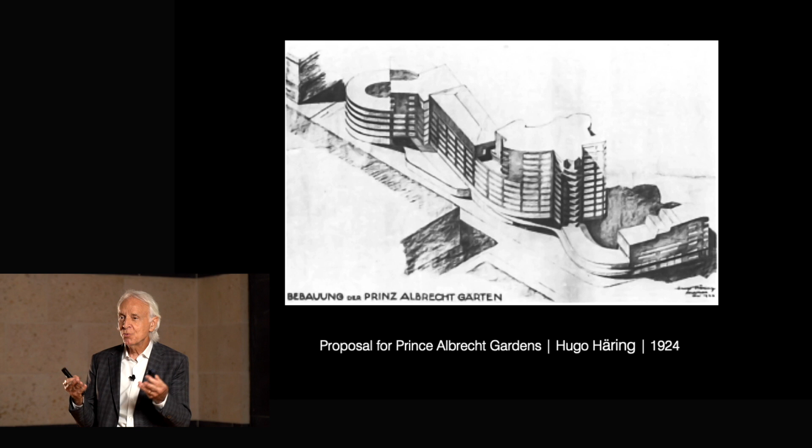So in his very early career, he's doing buildings like this. This is a residential complex in Berlin, actually never got built, but it was a project for it. In it, he was talking about movement. He said architecture petrifies and lays down once and for all the movement of life. He was not happy with architecture that was so static and so rigid, and much more interested in architecture that was fluid. Why is it that architecture can't take that same kind of form?

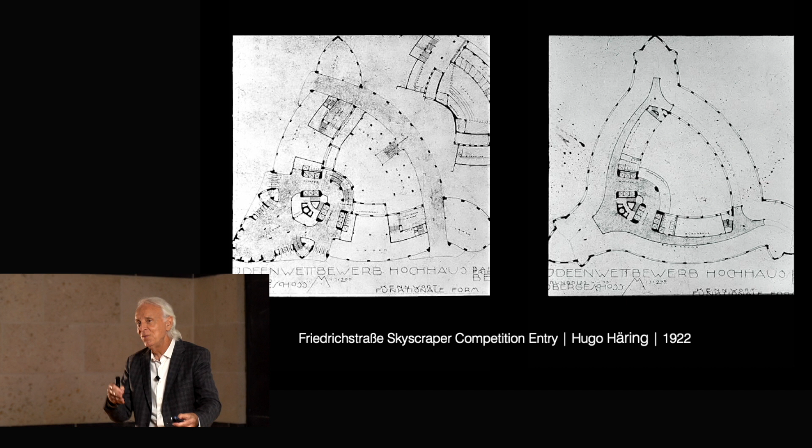This was another competition entry he did near the railway station, one of the main railway stations in Berlin. There are people who are surging and moving and coming and going, and so the architectural form takes those surging, moving, dynamic kinds of shapes in it.

This is a wonderful little building, again didn't get built, a lot of his buildings didn't get built. But in this particular one, he's designing a competition entry for a building for the Berlin Secession. I talked about in the last talk these organizations in Berlin, kind of artists and architects and people who came together and had exhibitions, dialogue, and conferences, really talking about issues of art and architecture and society. He was very involved, Hugo Häring, in Der Ring. This one was for one of those other organizations called the Berlin Secession. In it, we can see very clearly this emphasis on function and how form came out of function.

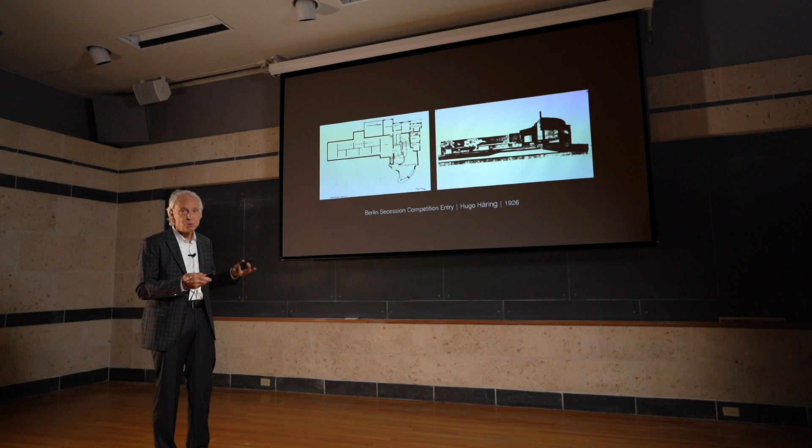So the program for this involved some offices for the people running the organization. It involved some conference spaces for members coming and meeting. These are static functions - I'm sitting in an office, I'm still. A rectilinear form is appropriate for that. In a conference room, I'm around a table. The room basically takes the proportion of that gathering-around-a-table function.

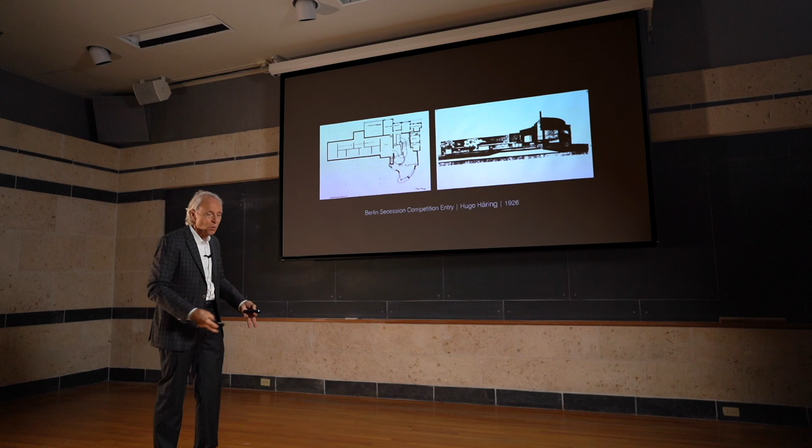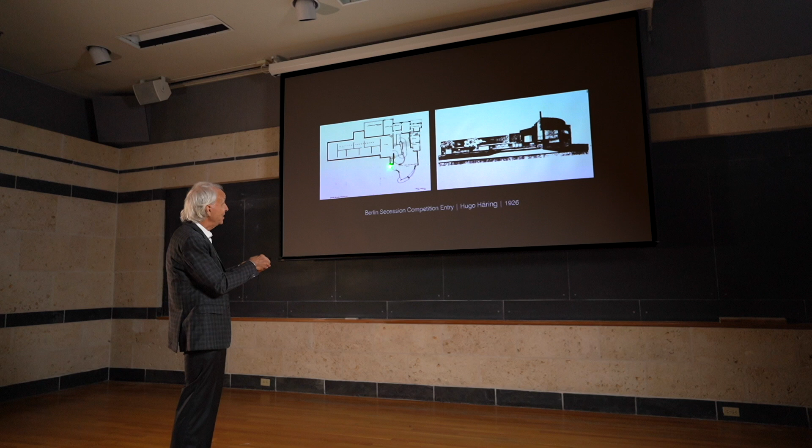But another very important function in the building is this exhibition space. You would have come in on the lower floor and swept up this stair like that. And what is an exhibit like? Well, when we're in an exhibit we're wandering around, moving over here, looking at this, moving over there, looking at that. It's a fluid, much more dynamic kind of activity. So he's making architectural forms that have that kind of fluidity to them.

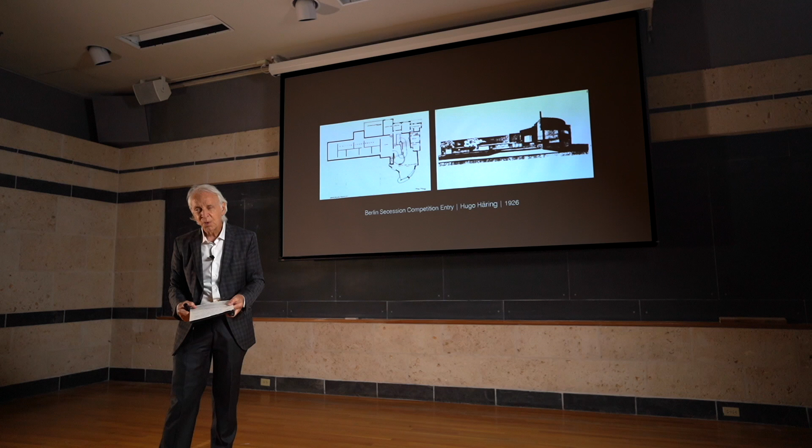I want to read a quotation from him in this regard. He says, the architectural image can only be discovered through a study of the function. I want to examine things to allow them to discover their own images. So he's really thinking through, what is this function? How can I allow it to discover its own image? How can I find within it the shape and form that's just right for that function? And in three dimensions, we see this building, part of it being very static and very rectilinear.

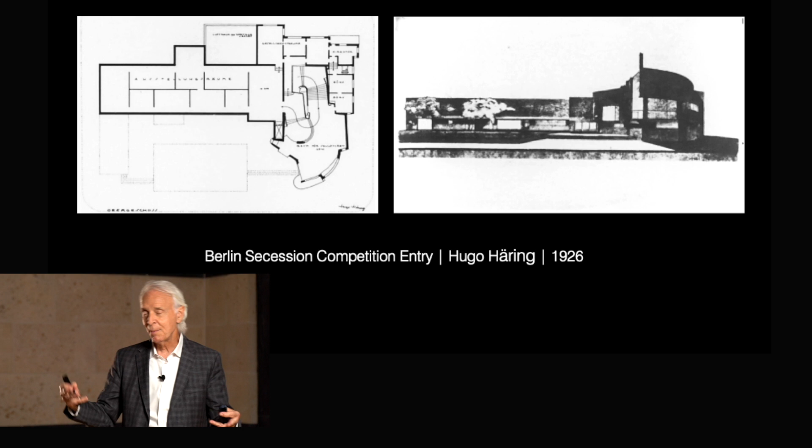And then at the moment when it comes alive and there's an activity and there's a reception or an exhibition opening, we see that dynamism expressed in the building itself.

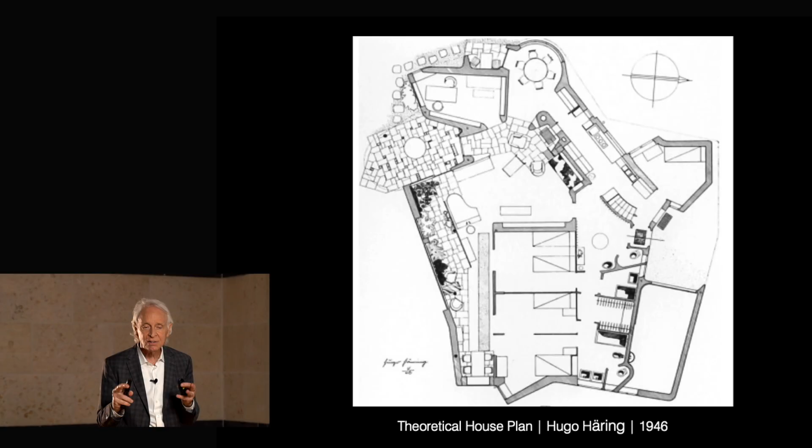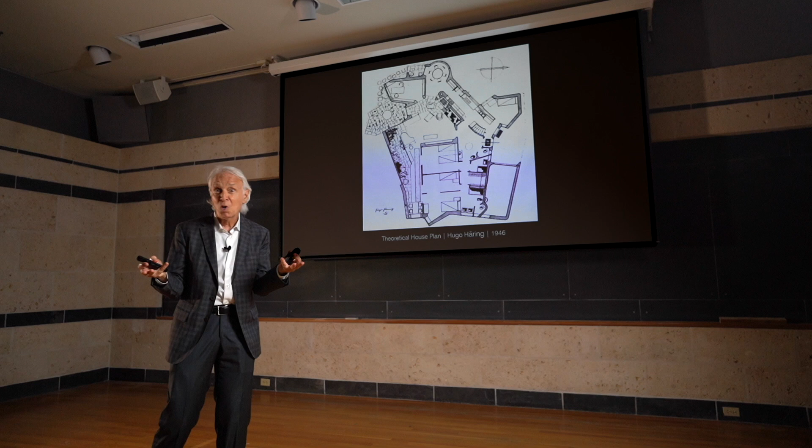You go into the living room here, and the living room is a whole series of little vignettes, little functions, like it's wonderful to gather around the fireplace and have chairs in the hearth and keep yourself warm. It's a cold climate in Germany. What a wonderful little ensemble around that activity of sitting by the fire and enjoying that.

And then right next to it is a kind of built-in sofa. Those chairs can move around and you can have a conversation area apart from the fireplace. But in that sofa area, you're also close enough to be warmed by the fireplace.

Over here, there's a little place for music where you can sit and play the piano and see out to the garden out here. Just the perfect spot for the piano, the music, and the view, all perfectly orchestrated. So when you might have a party, there's this fluid movement between all of these spaces, indoors and outdoors. And he's thinking of all sorts of scenarios for how that living room might work.

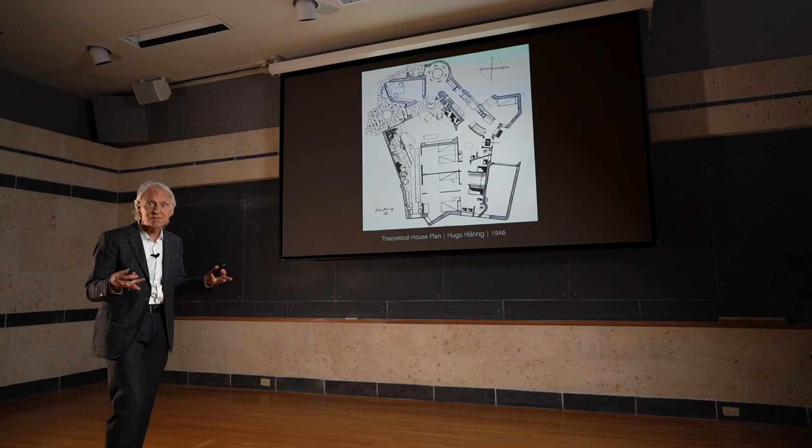The kitchen is incredibly innovative. At this point, a German kitchen would have been just a rectilinear room. You'd have a big old stove over here, a big old refrigerator over there, a big old freestanding double sink over here.

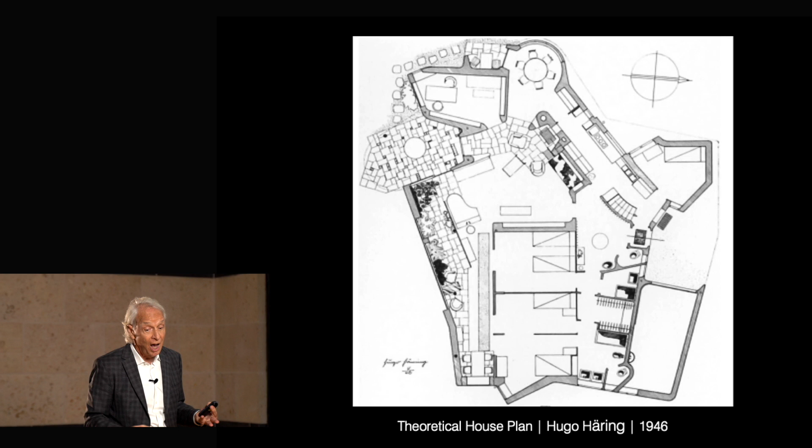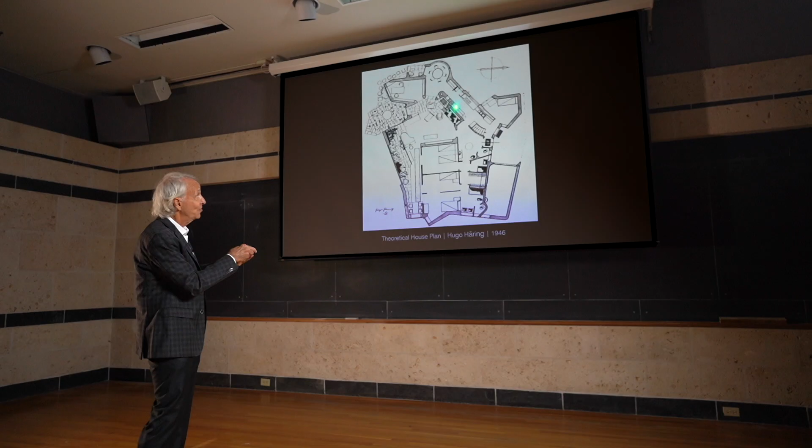But he's rethinking the kitchen. He's thinking of it as, how do I produce a meal? Where are my workspaces? What is my workflow? And he makes this very efficient kitchen through here, a kitchen that these days we'd look at and say, oh, that's not so different from the kitchen in the house I grew up in. But in 1946, function driving form for the kitchen was a new idea. And he was creating this very efficient kitchen right there.

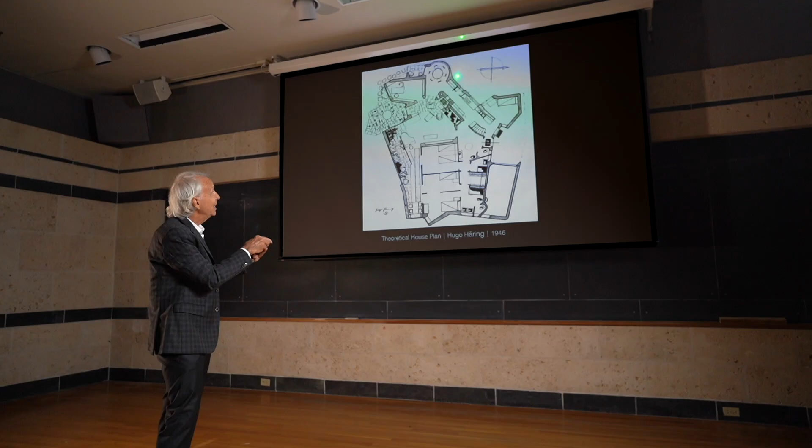I love the dining room. What is dining about? It's about the family gathering around the table, that kind of nodal function. And out of that, we get exactly that kind of form in the shape of the house.

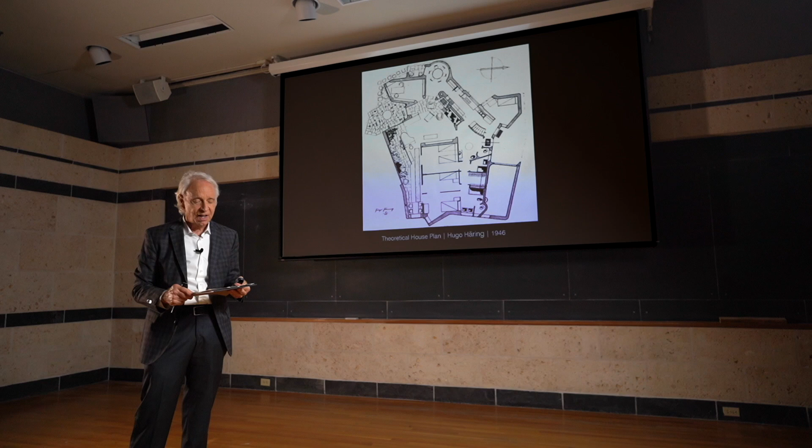Again, a quotation from Hugo Häring. He says, 'A house may be bred out of forms arising from work performance. The house may be looked on as man's second skin, and hence a bodily organ.'

God, I love that idea. If you just think of how your hand is a bodily organ, and how do you get the shape of that hand? Well, it has to do with being able to grasp, to shake hands, to slap, to do everything a hand needs to do. And your fingers and your hand are shaped perfectly to do that. How can I make a building that's like a bodily organ, that so perfectly reflects its function?

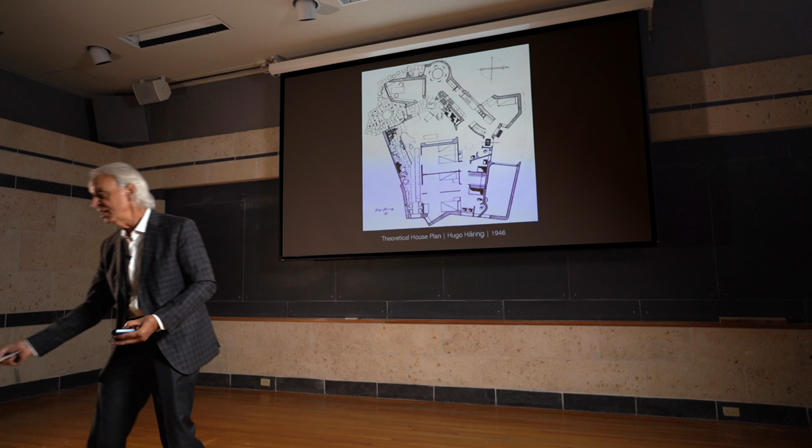Another quotation from Hugo Häring: 'Life is given to a building by awakening, fostering, and cultivating the essential form enclosed within.' So that's his mission, to figure out a way to make the building a real reflection of function. On the left, we see the stair. It just says stair, going up, vertical. It says that kind of fluid movement of our body going up, not the static rectilinear thing that most stairs would have been.

Now, we're going to concentrate on one building by Hugo Häring here. And I've chosen this building because it's one of the most complete projects he ever did.

This is the cow barn we're going to focus on, but it actually is a whole ensemble of buildings that he did for a farm in northern Germany near Lübeck called Gut Garkau. And in it, even the site plan is very much driven by function.

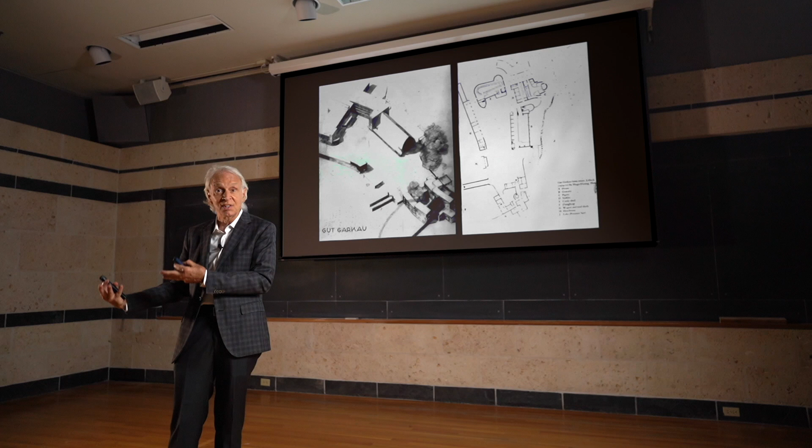You would have come in over here, there'd be the house for the farm family. Nearby that house would be the hen house. Generally, it was the woman of the house who did domestic duties, but she also took care of the chickens, so the chicken house was very near her primary domestic focus. Then there was the granary where they stored all of their food for the animals, and then there was the work shed, a place for wagons and carts and equipment and all the things they need in their farming. And then there are three different barns.

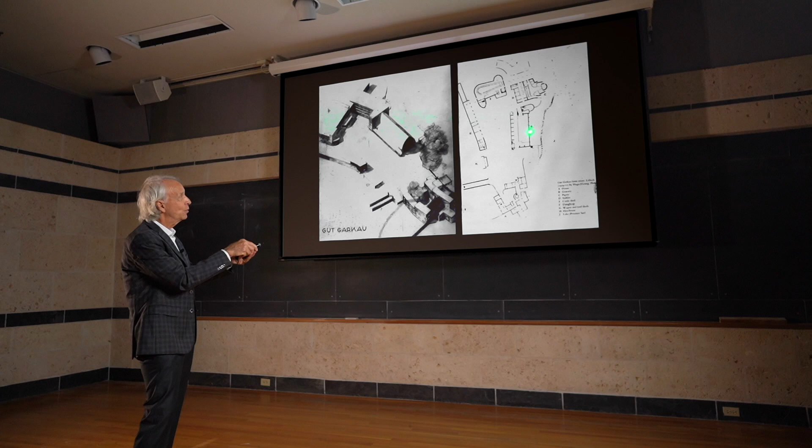There's a pig barn here, there's a horse barn there, there's a cow barn there. So as you're going from the house to the fields, you'd go by the work equipment to go out to the fields. If you're going to tend the animals, you'd go by the granary and where all the food was and equipment for the animals, to go to the pig or the horse or the cow barn. The cow barn and the horse barn are near the fields out here because you pasture cows and horses.

The pig barn is over here by the water, this is a lake right there, and they're near the water because you slop pigs and you need the water. You don't pasture pigs, so the pigs are where they need to be associated with that. The horses and the cows are where they need to be. The grain, the equipment, everything is exactly where it needs to be for function.

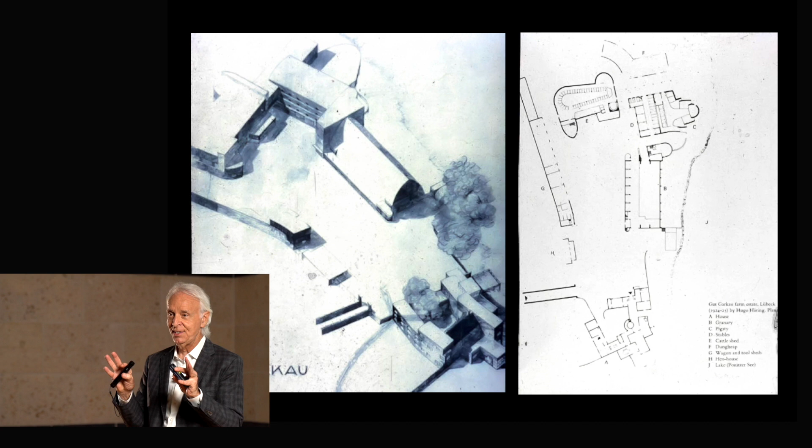And then this little area up there, that's the dung heap, that's where all the manure produced by the pigs and the horses and the cows goes. The manure is just as far away from the house as it possibly could be because obviously it's extremely stinky. So everything in that is perfectly associated with function.

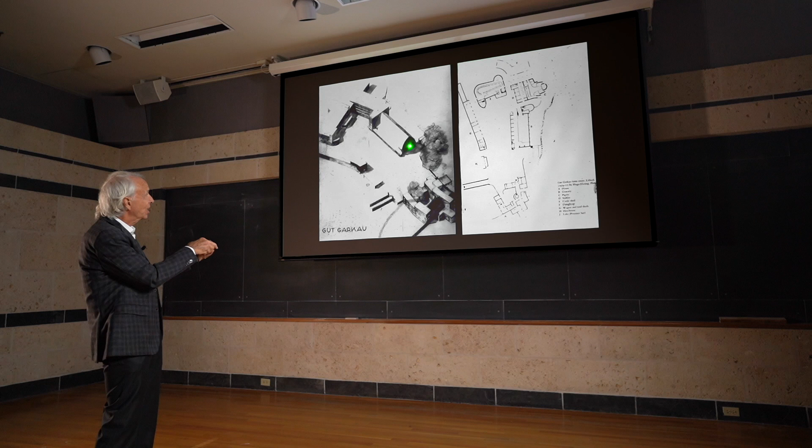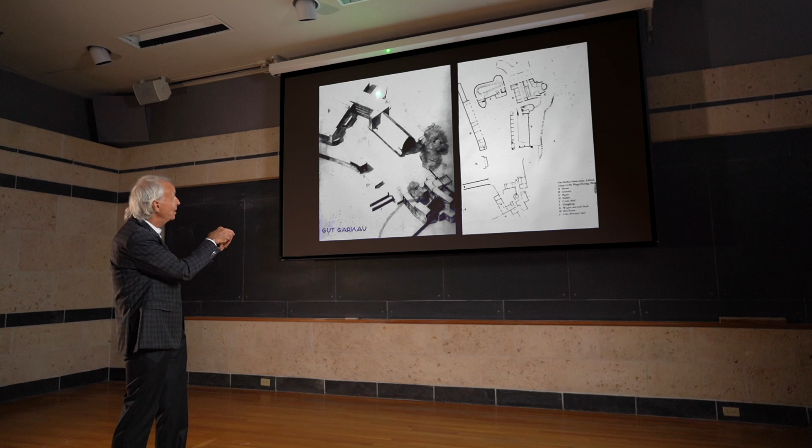And then in the three-dimensional architectural character of these, each of them has its own expression, its own character. So if you're making a granary, that makes one kind of shape. If you're making a cow barn, that's another kind of shape. If you're making a pig barn, it's another kind of shape. If you're making a home, it's a completely different kind of shape. So the architecture is coming very much out of the function of the building.

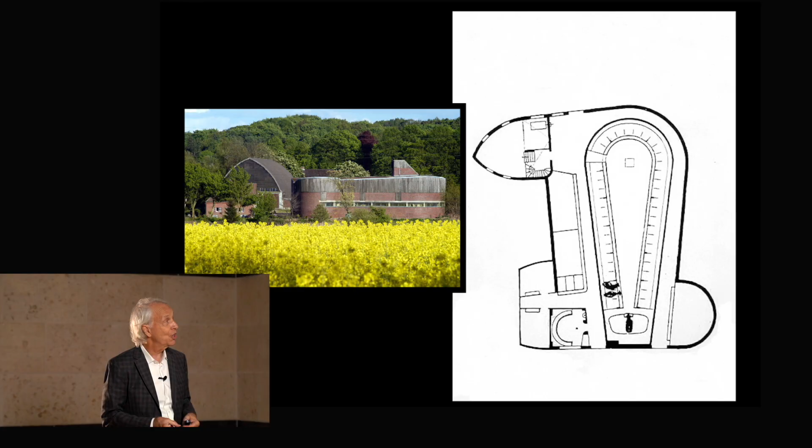So we're going to focus in on this cow barn, because I know cows and I totally relate to this building. I grew up in a rural community, we always had stock and pastures and barns and that sort of thing, and I was in 4-H and exhibited the animals at the county fair. No one in Texas does that anymore, but hey, that used to be quite a thing.

So in the process of that, I know what cows are like, and it's remarkable to me how completely Hugo Häring understood cows. Number one, you gotta understand cows are incredibly stupid animals. To get them to do anything is a chore. These poor dairy farmers have to get the cows to come in every morning and milk them, and every afternoon and milk them again. So it's pretty important that all this process works as smoothly and efficiently as possible.

So there are two things about cows that clearly Hugo Häring understands. The first is that cows play follow the leader. If you can get the lead cow to go where you want them to go, then the cows will actually organize themselves single file and go in that direction. That's just how cows move as a herd.

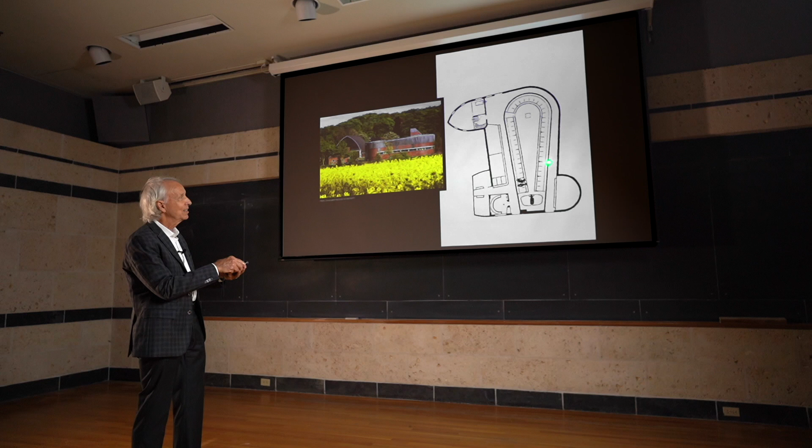If you want to make cows turn left, you have to make them gradually move a little by little. If you try to just put them on a halter and make them turn sharply like that, they can't make that work - they don't know how to do that. Häring totally gets this in his plan, so he's making the cows come in single file, moving very slowly, turning left around, and moving back out. You move them in, get the cow in the stall, you're milking the cow, and when you're through, there's that fluid movement.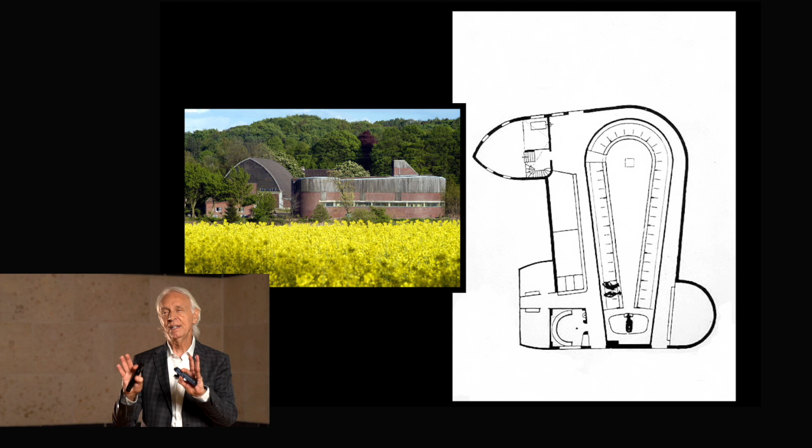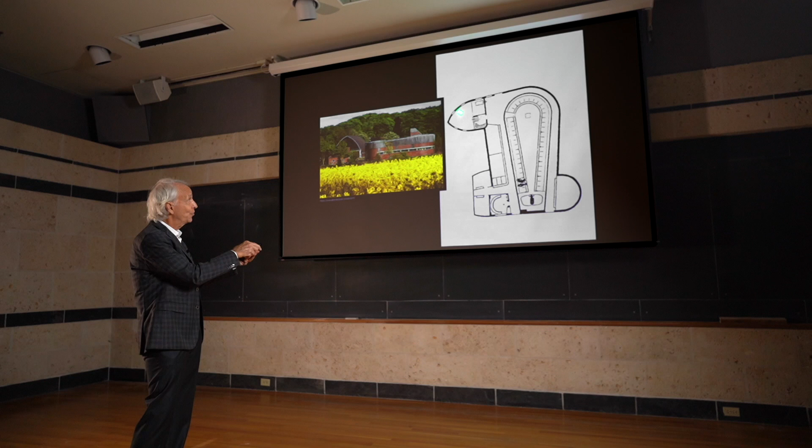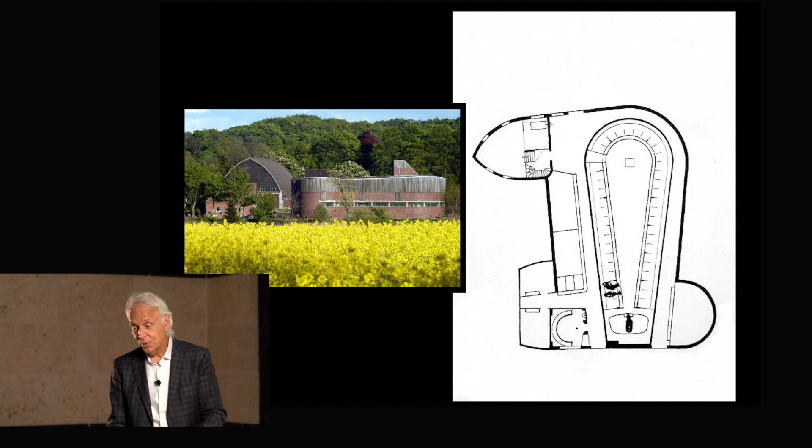This design is remarkably sensitive to the way cows move. Then there are areas around it - this is the hay storage area, this is the grain storage area. This one has a hay loft above it where you would send the bale down, break the bale, and then with a pitchfork you would take that hay and move it into here and put it in the feed trough for the cows.

Now, when you're pitching that hay, you as a human being have a certain radius of reach, and that is a perfect reflection of that radius of reach in the building's shape. What he's trying to do here is create no corners, because if the hay gets stuck in a corner, it'll mildew. You want to make sure it's easy to get all of that hay out every single time. The same thing is happening in the grain storage right here. The shape of those forms isn't just 'that was a cool shape' - it's totally generated by the kind of shape of a human being working and creating that radius.

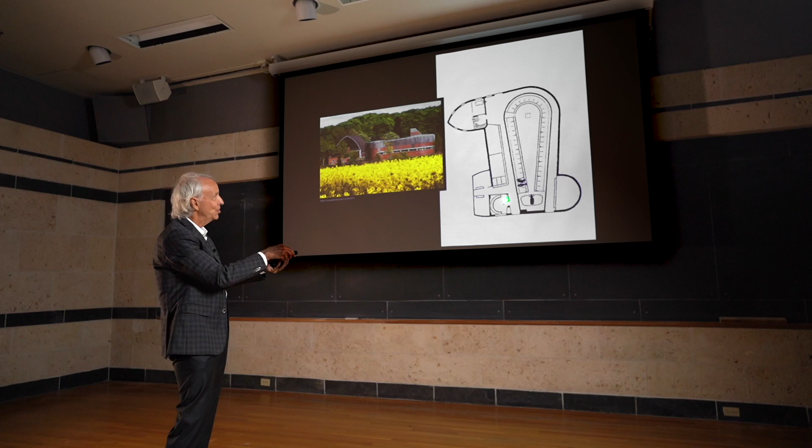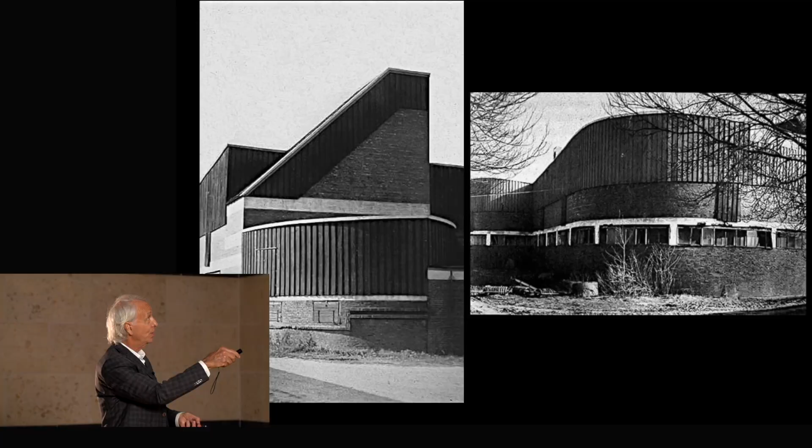So the cows are eating at the trough, you're milking them, you bring the milk into that central section, which is the human section, and then you take the milk out and put it in the milk storage area over here. Again, the shape and form of every piece of that building is being generated by function - that's where you store the hay up above, you pitch the hay down below, and that's the radius area where you're able to easily get to all the parts of the hay without leaving anything in a corner.

The windows in this are at exactly eye height for a human being. You do not want the cows seeing outside at all because they'd be distracted - you don't want the cows distracted. You want them totally focused on getting in their stall and not being spooked by anything outside. And yet the humans want to be able to see - is there a stray cow out there still? What's the weather doing, is that storm coming up? So you need the window just at eye height for the human beings for function, and that's what creates the architectural form.

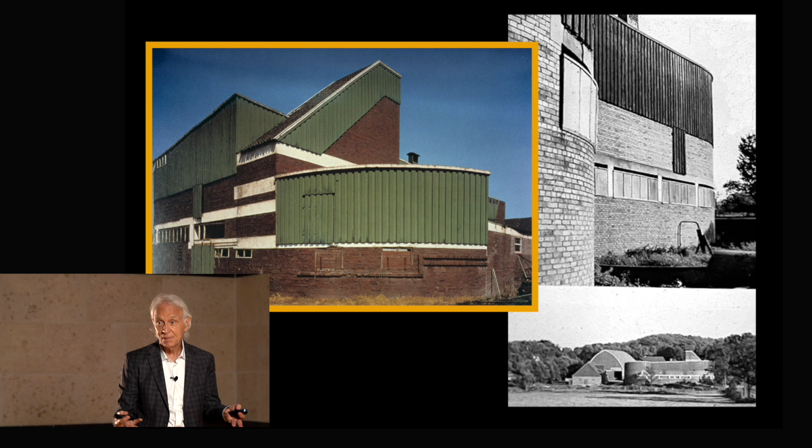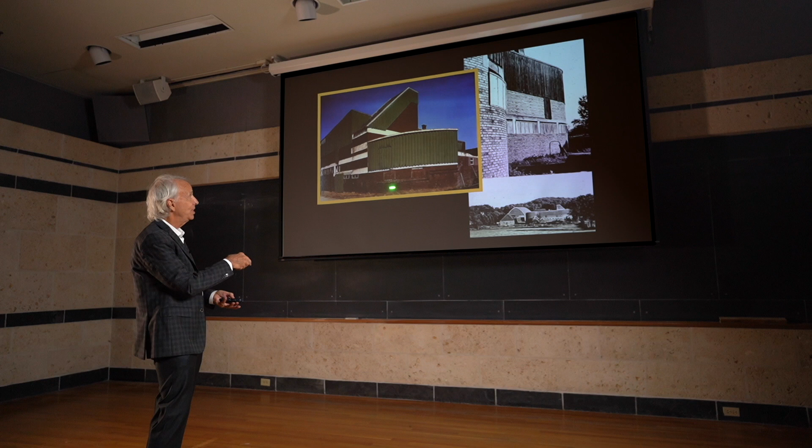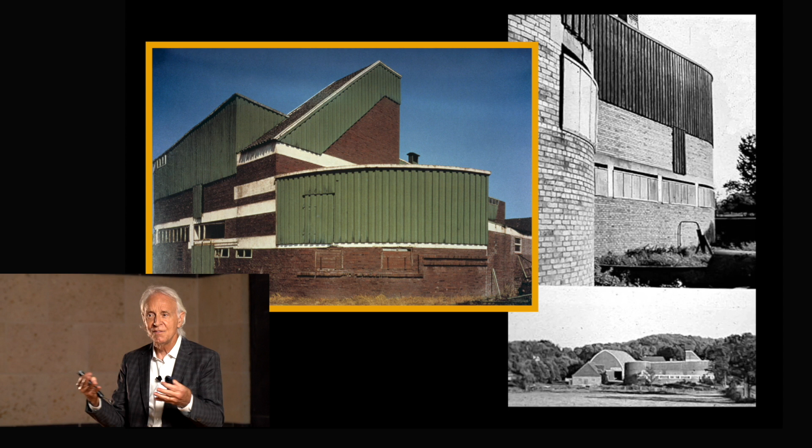In this era in Germany, they made buildings out of two materials primarily: board and batten wood, or brick. So this building is made out of board and batten wood and brick, and that gives it its material character. Everything in the building is so carefully considered according to the values of Hugo Häring - the importance of the individual building, of the expression of that building, of its function - all of that is generating architectural form.

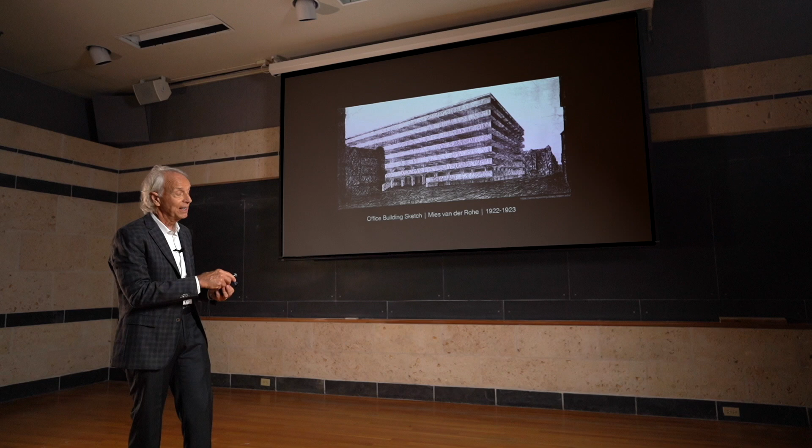Now the second person we're looking at here is Mies van der Rohe. Mies van der Rohe, as I mentioned last talk, is very good friends with Hugo Häring, and for a while they even shared an office space. And yet he has completely different ideas about architecture. In his early career, when Hugo Häring was doing that wiggly residential building, Mies van der Rohe was doing these office buildings made out of steel and concrete, which at the time were very new materials.

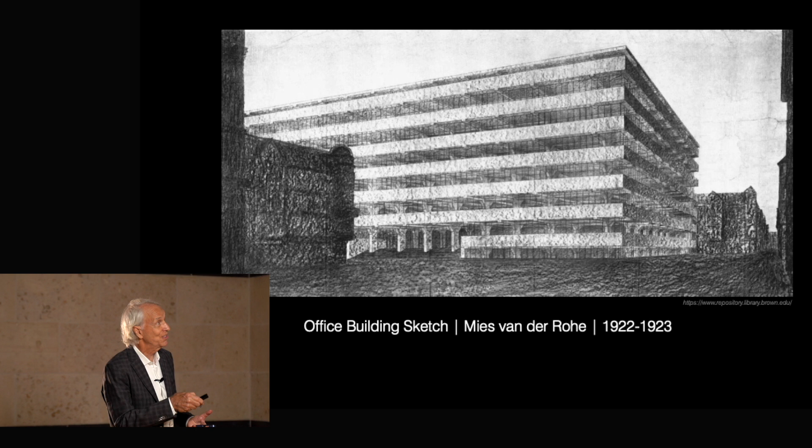His idea was that architecture needs to come out of construction - it should express the spirit of its age. Now we have these new technologies: reinforced concrete, steel, large sheets of glass we can use. We need to completely reinvent the way we build an office building based on these new technologies. We'd look at this building now and say, well, that's not so different, that's just like a big concrete office building. But honestly, it's Mies van der Rohe who's inventing this vocabulary and really starting the notion of what a modern office building is.

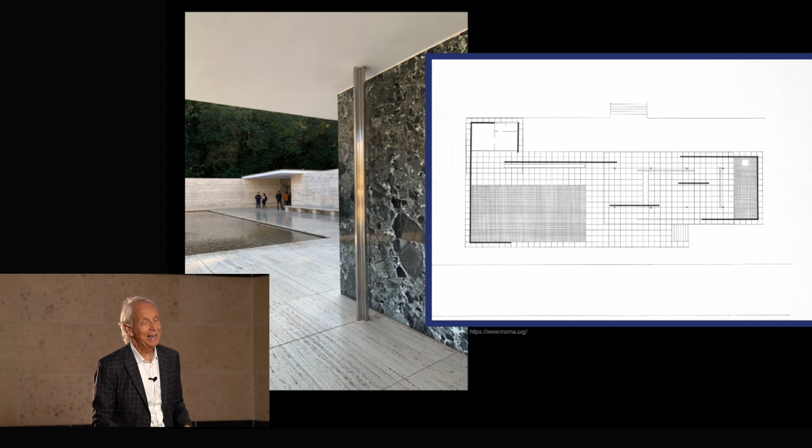This is one of Mies van der Rohe's very most famous projects - the Barcelona Pavilion in Barcelona, Spain. It was done by Mies van der Rohe for the 1929 World's Fair in Barcelona, and this was the German pavilion in that fair, made as an exhibition building. We could look at the plan of that building and ask - well, what is the function?

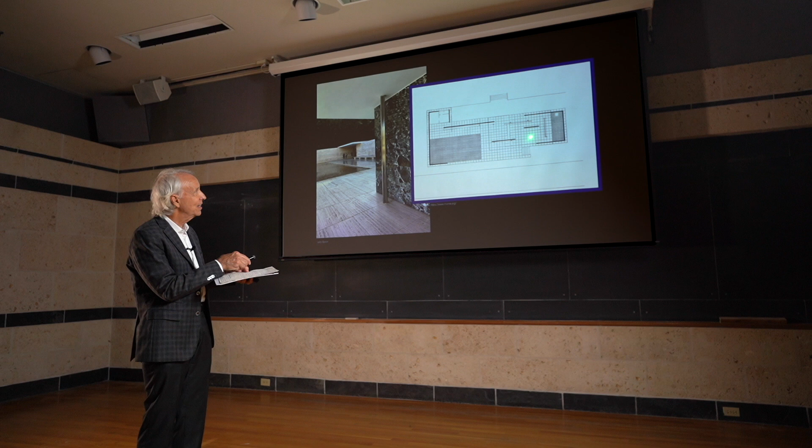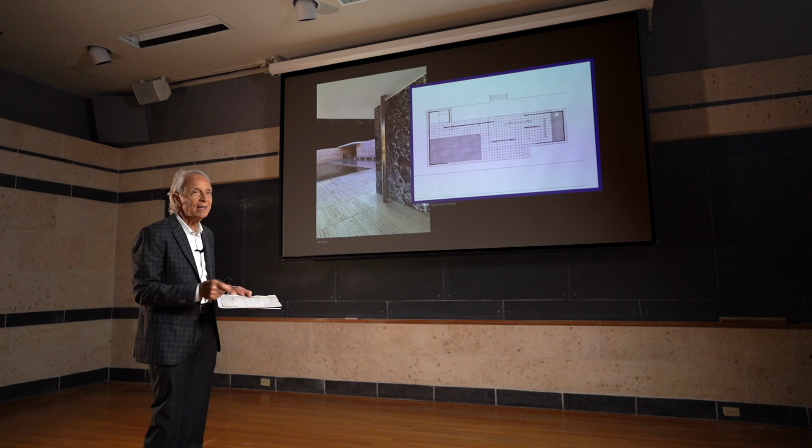As he depicts this, what he's depicting is walls—that's construction—and the series of columns that you see there, that's construction. It's really made out of these incredibly slender, chrome-plated steel columns, and then these walls. So it really is construction that he's talking about.

But function, well, it was a lot of different things. Sometimes there were exhibits put in here, sometimes receptions. He actually designed those two chairs for the Barcelona Pavilion, for a reception when the King and Queen of Spain were coming. So sometimes there were events like that in there, but it isn't really driven by function.

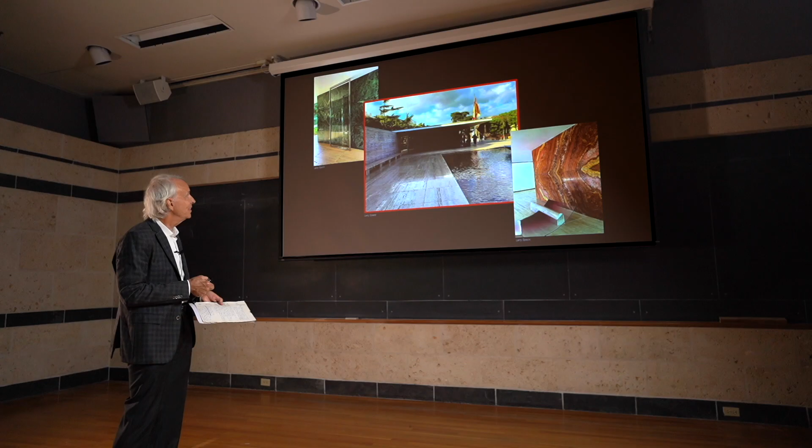It's driven by construction and materials—these beautiful marbles, this soft frosted glass—and it's really that reinforced concrete plane of the roof and these slender columns holding it up. That's what's generating the architectural character.

Here's a great example of construction generating form. This is generally called the brick country house. It was another one of those projects that never got built, like Hugo Häring's projects sometimes didn't get built. These guys were on the cutting edge. In this case, he's looking at how would we build a house out of brick.

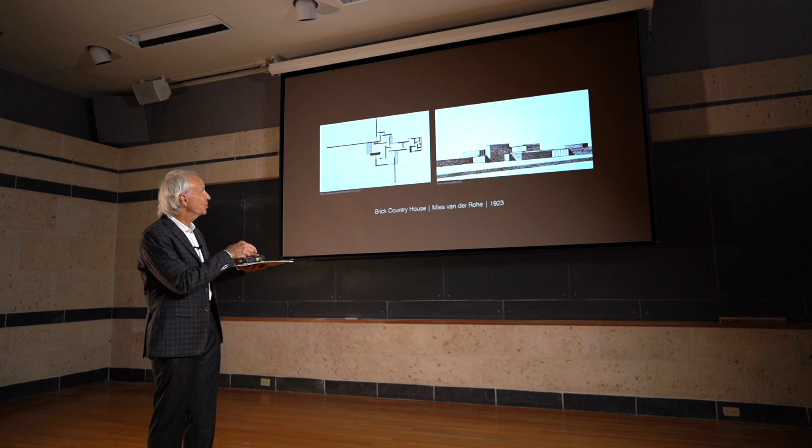It starts with thinking of brick as a kind of earthen material, so we're holding up the earth and retaining a wall out of brick there. Then you build these big, solid, thick brick walls, and you make the windows as the voids between those brick walls. The plan is really a series of brick walls interlocking with each other.

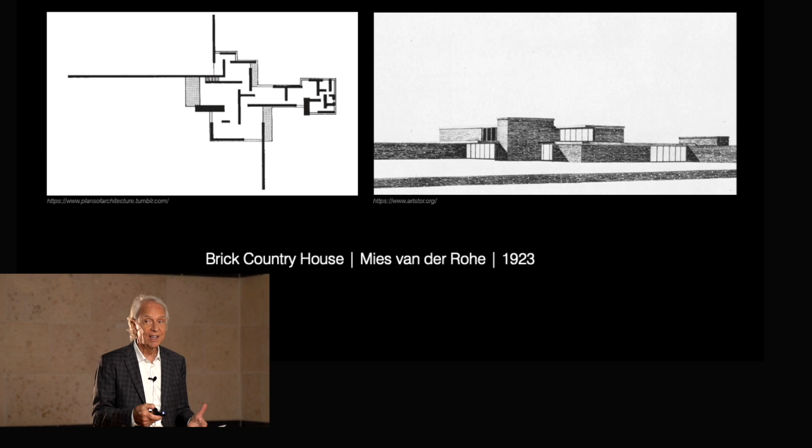Now, you could look at that plan and say, where's the bathroom? I have no idea. Or where's the kitchen? I don't know. I don't know where the bedrooms or living room are—it really isn't generated by function. It's generated by this notion of how do you build authentically in this heavy brick material, and then how do you make openings in it that don't violate that notion of the big solid brick wall?

This is a house he did that did get constructed, the Lange House in Krefeld, Germany. Every single bit of that house is made out of brick—brick floors, brick walls—and everything is based on the module of a brick, so that all dimensions in the building are really shaped to that brick.

After Mies immigrated to the United States, he did this project for the Illinois Institute of Technology in Chicago. He was a faculty member there, designing a whole new campus for IIT. It was an existing fabric of the city like that, and he's completely hollowing it out and redoing it, making a completely new kind of campus there.

As you can see, the buildings are completely unlike Hugo Häring, who even in a little farm complex did very, very different buildings. In this case, all of the buildings are very similar to each other. Mies did not believe that every building needed to be unique—he thought there were principles that could be broadly applied.

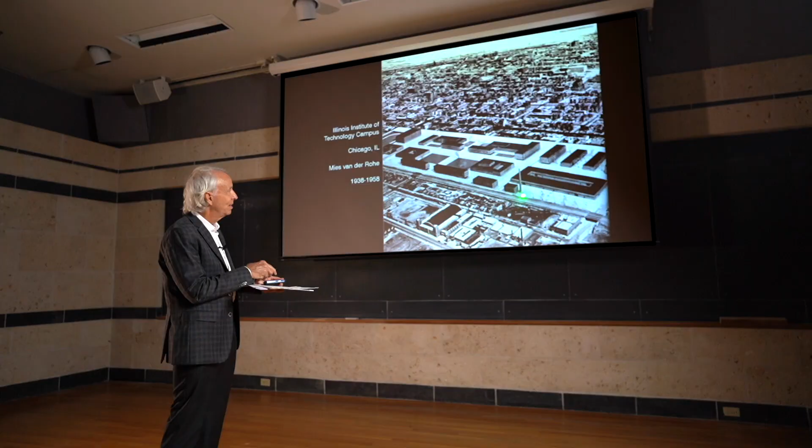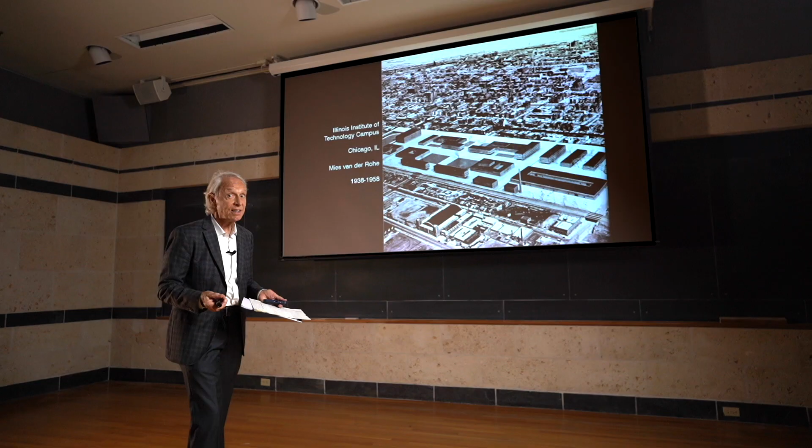That is the physical plant of the building, the kind of utility center. Just off the image here, there's a chapel at IIT, about the same size as that, and honestly, they look pretty much the same. So the function of a power plant and the function of a chapel, although those are very different, wouldn't necessarily create a different architectural form. And that's true all over the campus.

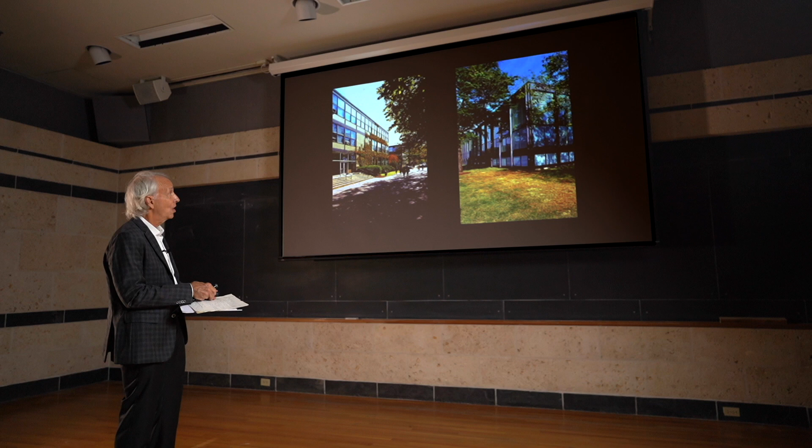Some of these campus buildings are a library, some are student housing, some are laboratories, some are classrooms. But all of them share the same vocabulary—this steel frame with an infill that's in brick and large sheets of glass—so that the entire campus has this homogeneity, and it also has this technological expression.

That was very appropriate for IIT. It's an institute of technology, and the technology of building is very much generating the character of their new campus.

This is a final building I want us to look at by Mies van der Rohe, one of his most famous buildings, which is the Farnsworth House. It was done for a single woman, Edith Farnsworth, just outside of Chicago in Plano.

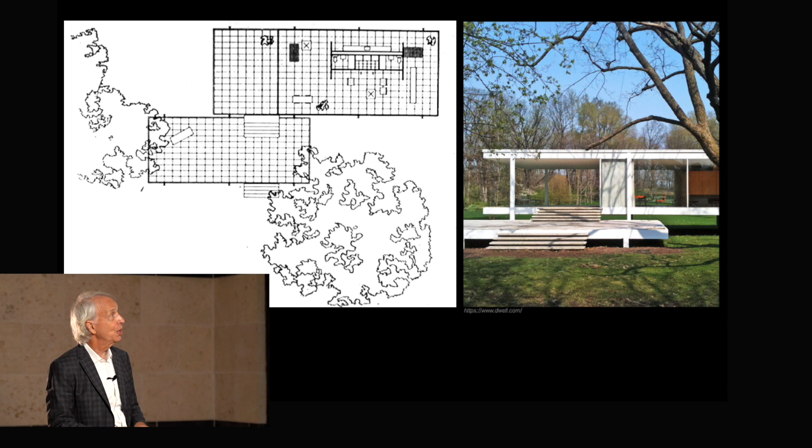It's on a beautiful site, very pristine natural site by the Fox River. You can see in the plan of this house, it is just kind of one single room made of glass. There's a porch in the front, and a terrace off to the side. But that plan is extremely flexible.

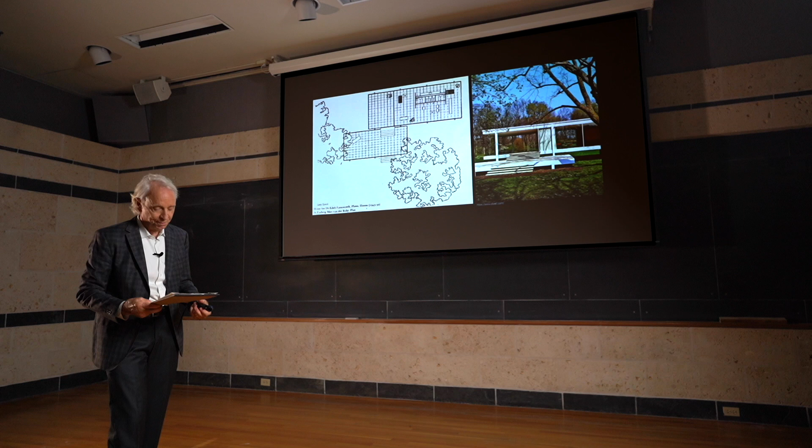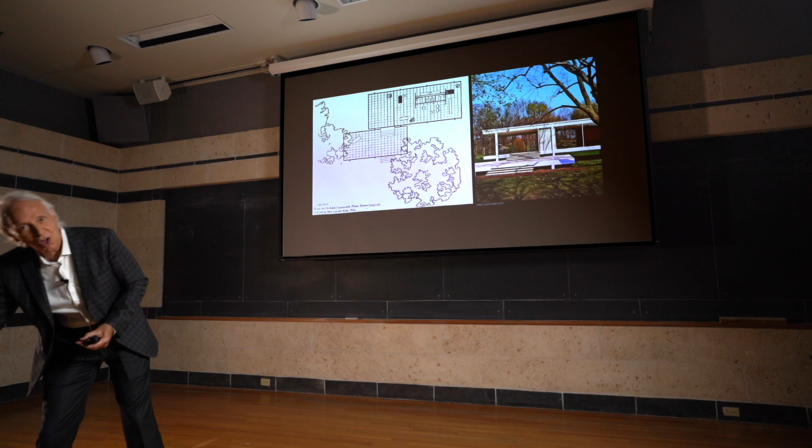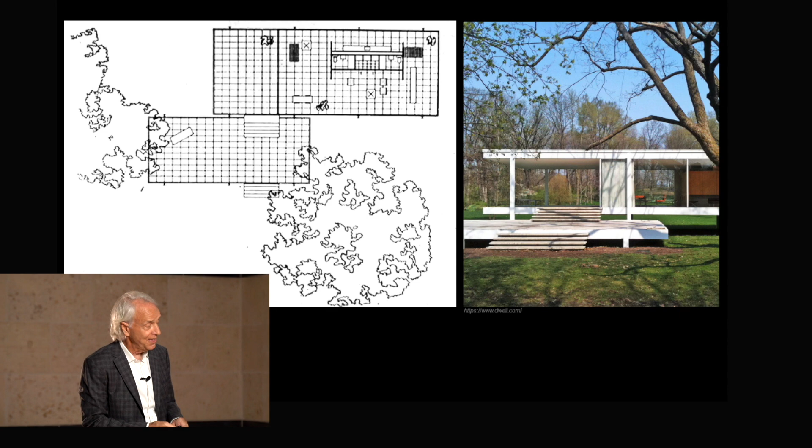Mies van der Rohe said, 'The architect should, like a good gardener, bind the tender plant of life to a grid or a trellis, giving it support and, by that very fact, freedom.' His notion is not to put a straitjacket on function, but to make a grid or trellis, and let architectural function find its own shape within that. That's exactly what's happening in the plan here.

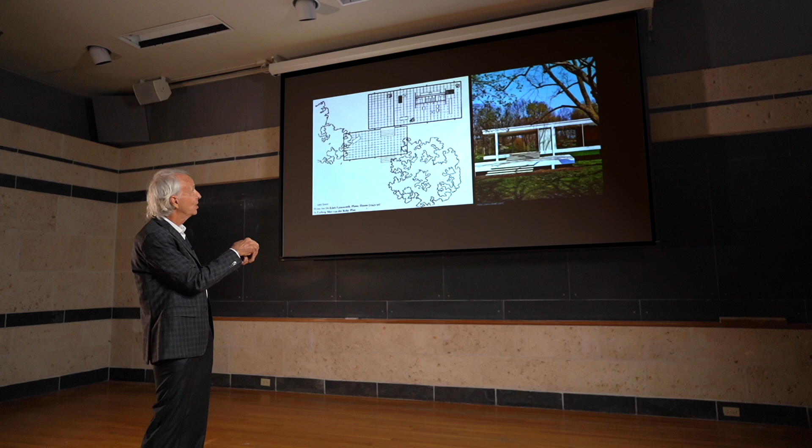It's a very open space. There's kind of a sleeping area over here, maybe storage for clothes there. There's a kitchen back over here, a dining room table there, a little sitting area here, another one over here. But you could easily move the dining room table closer to the kitchen, or put the bed back over here. It's completely flexible.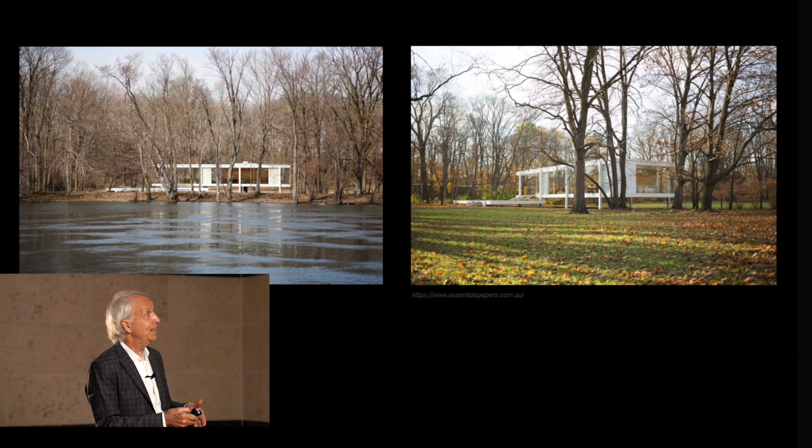He's letting it be driven by this notion of a grid or trellis and letting life occupy the space within it. So there it is on this beautiful natural site. The Fox River sometimes floods, so the whole building is put up on stilts so that it sits very high on the site. Beautiful views out, and a very explicit steel frame.

We see those steel columns catching the steel beam here and here. Even the stair shows the stringer expressed as a steel element, the supports that go across, with the treads in stone on top of that. Everything is made almost like tinker toys so that you're seeing the construction of the building.

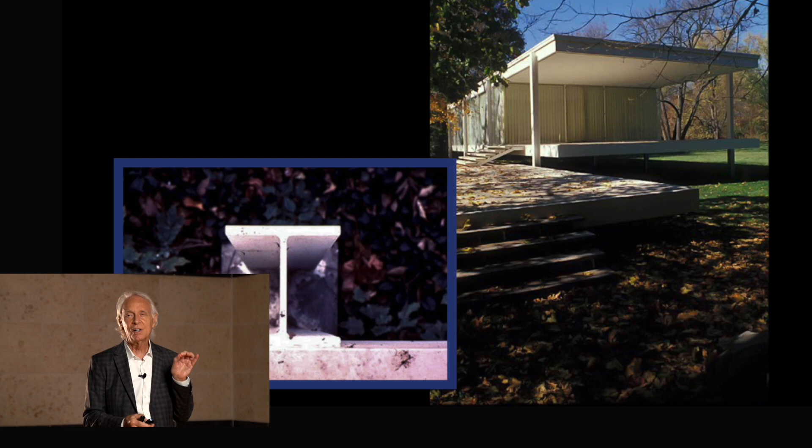Inside, just these big, simple open spaces with huge sheets of glass that open you to the outdoors and create a very flexible space for living however you want to. Mies van der Rohe's quote was 'God is in the details,' so he's very meticulous about all of that. It's a beautiful example of construction generating architectural form, the primary value of Mies van der Rohe.

The third of these architects we want to talk about is Albert Speer. Remember the values he had - he was Hitler's architect. It's very much about creating awe and wonder and drama, a connection to the great empires of the classical eras, Greece and Rome, and a focus on building up this leader, Adolf Hitler.

He was a young man when he first got commissioned to become the architect for Adolf Hitler. At that point, they tried him out on a project for a rally to be held in Nuremberg, the Zeppelin Field rally ground. Hitler loved to have these big rallies; that was a lot of how he got popular.

He was a very good speaker, but he also understood how important the setting was for the rally, and he always wanted a kind of architectural background for these events to happen. So they had Albert Speer create this background for the Zeppelin Field rally.

He made the big stage setting very dramatic, the place where Hitler would speak from, his sycophants and assistants around him, and the teeming masses of people, with military marches and bands, climaxing in Hitler giving a rousing Nazi speech. But there was a really big idea in Speer's head.

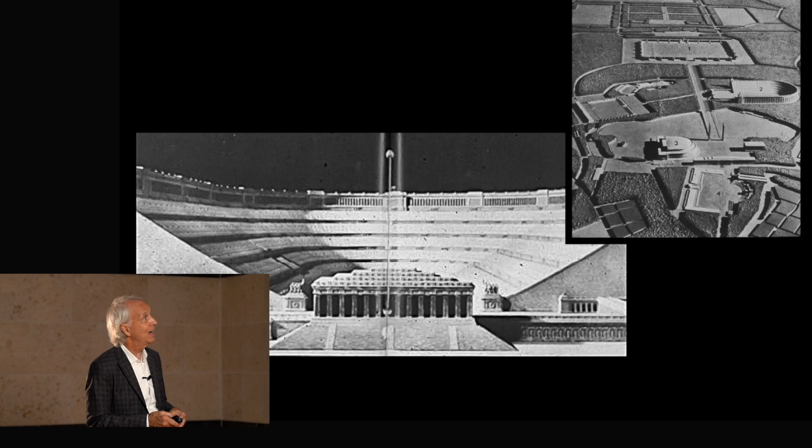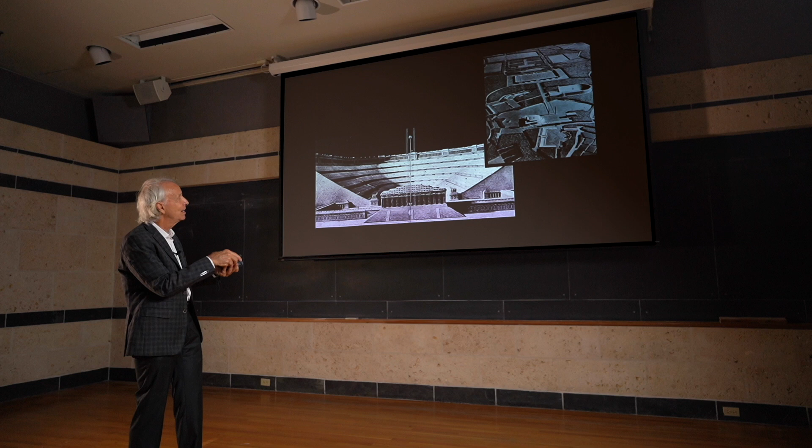Again, it's a mammoth project: this huge stadium, two large parade grounds, a big conference center. The stadium would have seated 400,000 people, four times as much as Darrell K. Royal Memorial Stadium, six football fields long and five football fields wide. Its space would have been three times the volume of the pyramid at Cheops. Massive, massive stadium. The parade grounds would have had this sense of grandeur and awe of ancient Rome, very powerful, giving a sense of majesty.

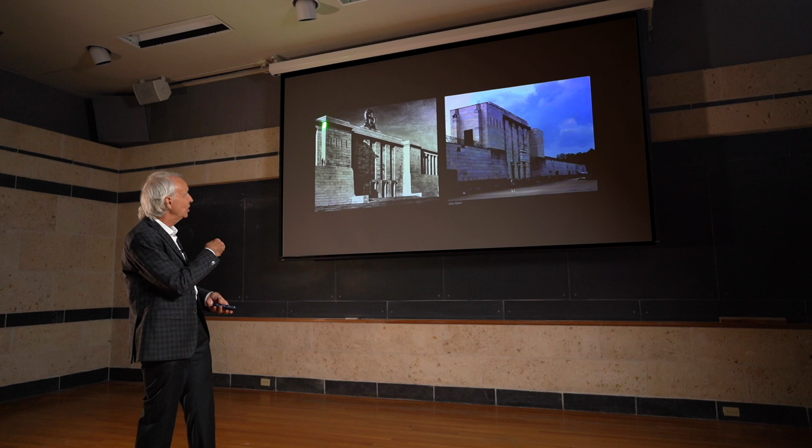This is what it looked like when finished, and these are the ruins that exist more or less today. While it was under construction, Hitler and Speer were out there talking about the building. They were making most of the complex out of reinforced concrete, the general technology of the day. Then they began to think: wait, we're building for immortality here. We want people 2,000 years from now to look back at the Third Reich like we look back at Roman times. If we're going to do that, what's it going to look like when reinforced concrete falls apart and you have rebar sticking out, rusting and staining the concrete? This is not going to make beautiful ruins, and we want beautiful ruins.

So they switched and began to make the buildings out of solid granite. This conference center is made out of massive blocks of granite so that it would make a beautiful ruin. In fact, portions of the complex — this is how it was originally, and this is how it was several years ago when I was visiting it — it's making rather a beautiful ruin, so that's being accomplished.

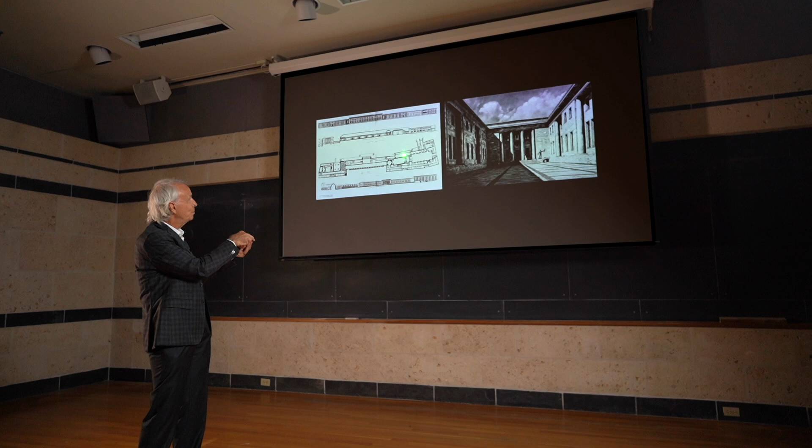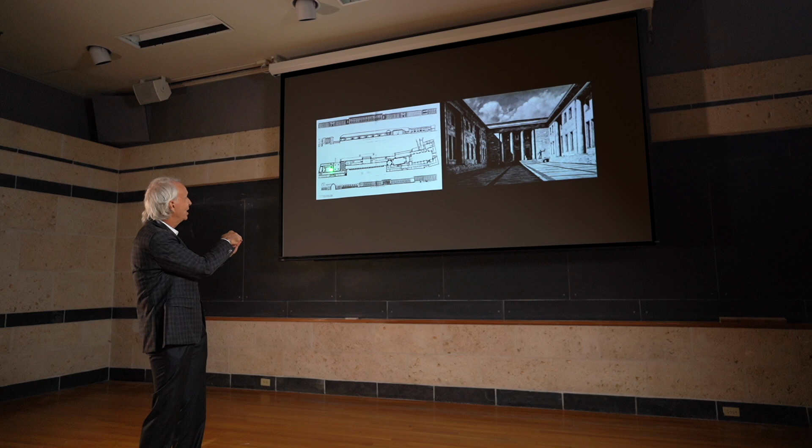Another project he did for Hitler was his headquarters, the new state chancellery in Berlin. This would have been the front of it on a major street in downtown Berlin. You would have gone through there into a courtyard, through a portal, into a beautiful reception hall, into a domed space, down a long gallery, and finally into Hitler's headquarters with a huge conference room and his office at the end. This is orchestrated to tell you you're about to see the very, very important Adolf Hitler.

So you go through that courtyard, into the portal, then into this beautiful reception hall with inlaid marble on the walls and beautiful light from above. From there you go into this grand rotunda, and from the rotunda into this gallery, lit on one side, with ancient tapestries and beautiful finishes. You click, click, click, walking down, down, down this area, and finally you get to Hitler's conference room or his office — this huge, grand office with Hitler behind the desk. The message is given by the architecture; it tells you the importance of this man you're seeing.

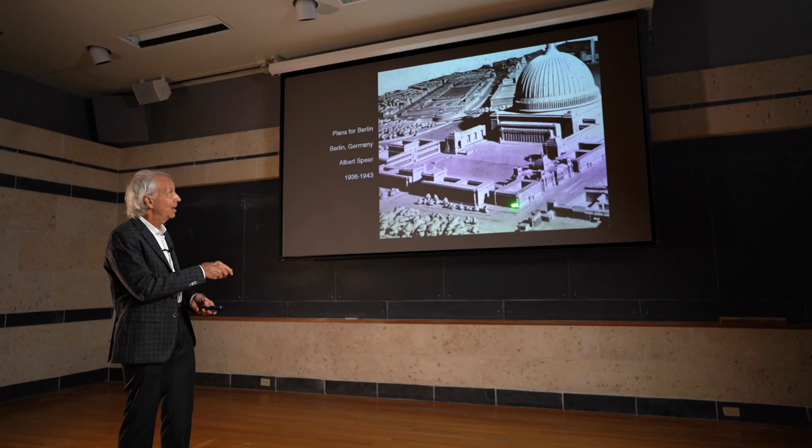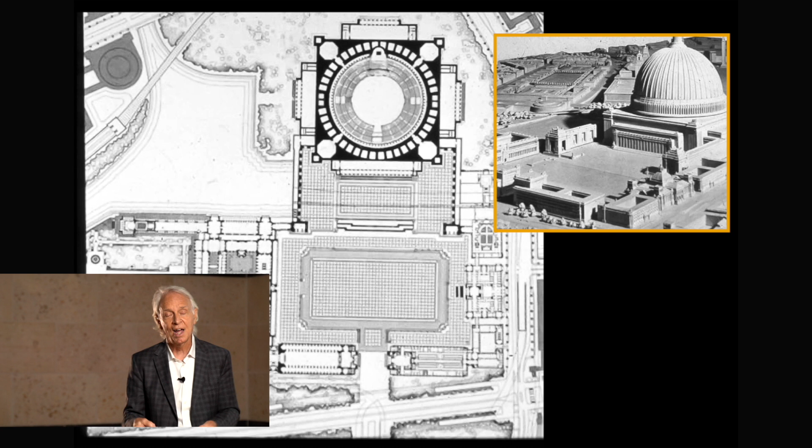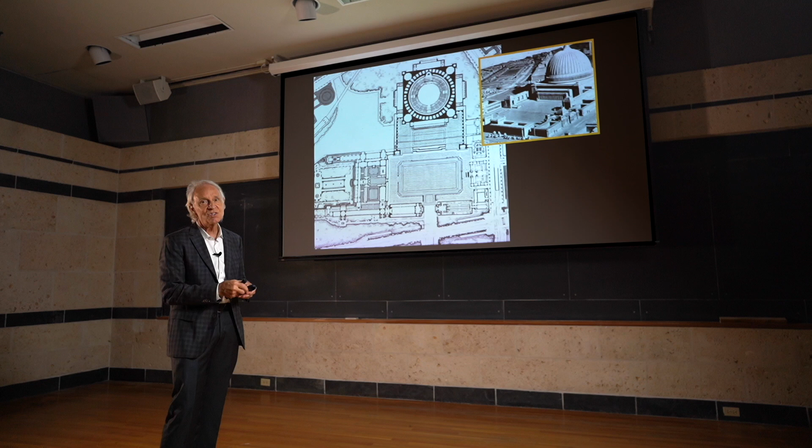This assembly hall would have been unbelievable. If you can see right here, that's a building that still exists, the Reichstag, kind of the Capitol building for Germany now. That building is about the size of the state capitol here in Austin. So imagine, if that's the size of the state capitol, the size of that great assembly hall — it was 16 times the volume of St. Peter's, and the diameter of its dome was five times the diameter of St. Peter's. It would have been an incredible, incredible space. There you can see the tiny little people down here — you could have fit a 60-story building inside the interior of that space.

Now, that was Speer with a different set of values than Mies van der Rohe or Hugo Häring, really making buildings out of the value system he had. In all three of these cases, I think it demonstrates how important values are in generating architectural form.